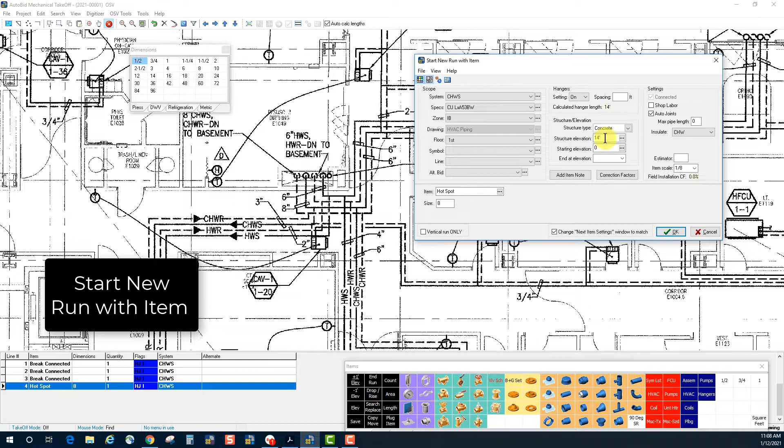The start new run with item allows us to verify all our scope items. It allows us to set elevations and also various toggles for the various different settings. It also allows us to start out with an item. That item could be a valve, could be a flange, could be a coupling, could be a hotspot.

Now, I'm going to work on this particular part of the drawing initially. We can see this is an 8-inch chilled water return down to the basement, and we're on the first floor. So that means this is a vertical pipe here before it comes up and starts running horizontally.

So let me check my scopes. Yeah, it's chilled water return, okay? And the floor and all that stuff is correct. My starting elevation is going to be 0 because I'm going to do it from the floor up.

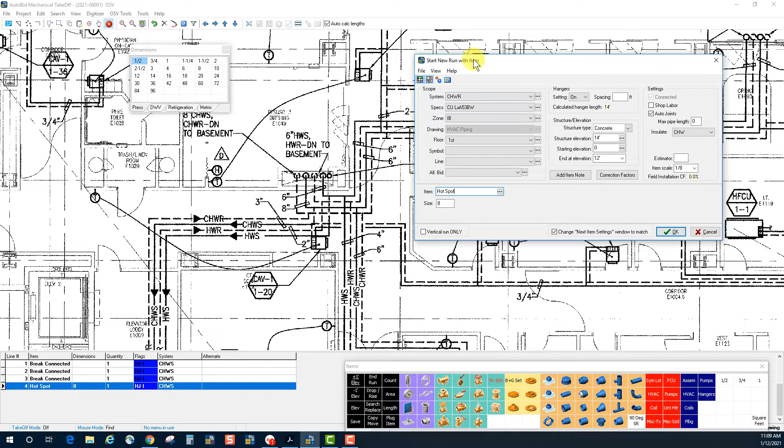Now I'm going to continue horizontal at 12 feet. That would be the end at elevation command, and that is the height that we're going to do our first vertical piece. I'm also, since I can start a new run with an item, in this case I'm going to start out with a riser clamp. And I could verify my size is 8-inch. I'm going to click OK, and I'm going to click on where that pipe comes up from the basement.

As I go along, you'll see it put the X in there, which indicates a vertical for us. So just continuing along, I have a pipe size change here of 6, just as a little reminder. All you have to do is put the new dimension in this change dims in the run field, and it'll automatically put that reducer in for you. And you would just continue down, clicking the branches if you'd like to click the branches, and keep an eye out for size changes. So let's see what that did for us.

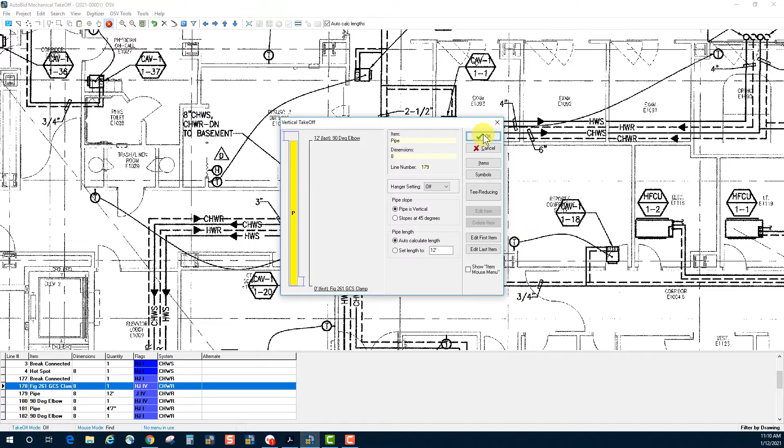I'm going to click on the X, and you can see we have that vertical pipe right at the beginning. It's 0 feet up to 12 feet, with an elbow at the top and a riser clamp at the bottom.

Now let's take a look at start new run with item once again. So I'm going to bring up that command. The situation that we're looking at where we're going to use this happens to be this pipe right here, which is a steam vent. And you should notice it just goes from floor to floor. It doesn't go horizontal, it just passes through the floor.

So we're going to be able to take advantage of this vertical run only option in the lower left corner of this window. Now I'm going to verify my system is correct. I'm going to use the steam low pressure for this. I also have to check my elevations for that vertical run only. So I'm going to start out at 0 and I'm going to go up to 14 to bring it up to the slab level for the next floor up.

When I click OK, and I come over here and I put in this vertical run only, you'll notice the drag line is not attached because this was a vertical only. So I will end my run here just to verify the run is ended. And I'm going to click on that vertical piece, and we can see that it started out at 0 and it ended at 14. Now you can go edit these items, what you want to begin with and end with.

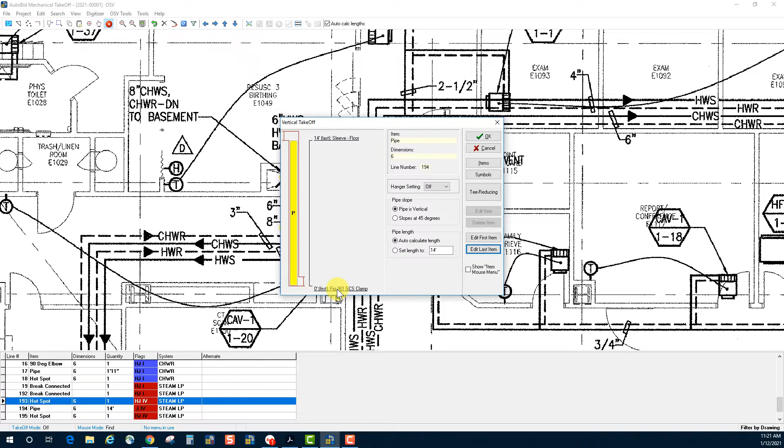So I'm going to edit the first item, and I'm going to put a riser clamp there. And I'm going to edit the last item, and there I'm going to put a floor sleeve. Now, we did not have to edit those items, but I wanted you to see that you could edit items once they're in the vertical.

So that was, just as a real quick review, using the vertical run only for pipes that just need to be vertical without any horizontal part to them.

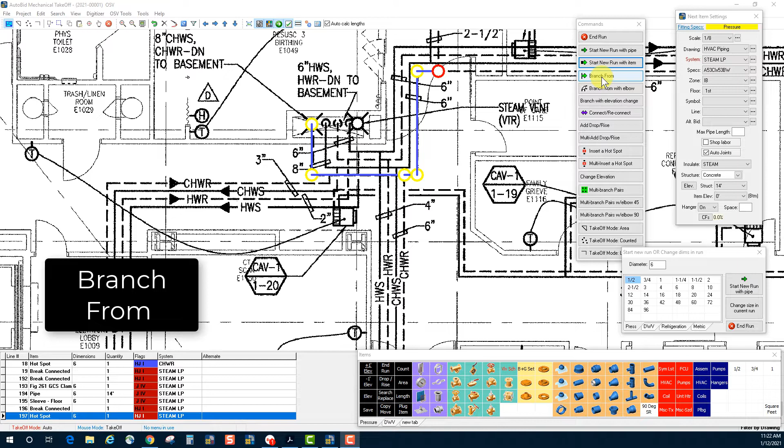Okay, the next command we're going to learn is to use the branch from command. Now this is very useful if you're going to branch from and come out straight horizontal out of the size of the pipe. So I'm going to use that for this situation right here where I've got this pipe coming out a 3-inch off that 8-inch.

So when I hit the branch from command, it popped up this little window here that wants me to verify the size.

So I'm going to put a 3 in here, and now I'm going to just click where that branch starts, and then I would go along and continue to take this pipe off as it works its way down the drawing. Let's see what it did for us here.

If I go and click on this warm spot, you can see that it inserted a reducing T for me, an 8 by 8 by 3 reducing T. Of course, the fitting specifications will probably change that into a weldolet, but it displays as an 8x8 reducing T on the screen. So that was very simple, the branch from command when you want to come out straight.

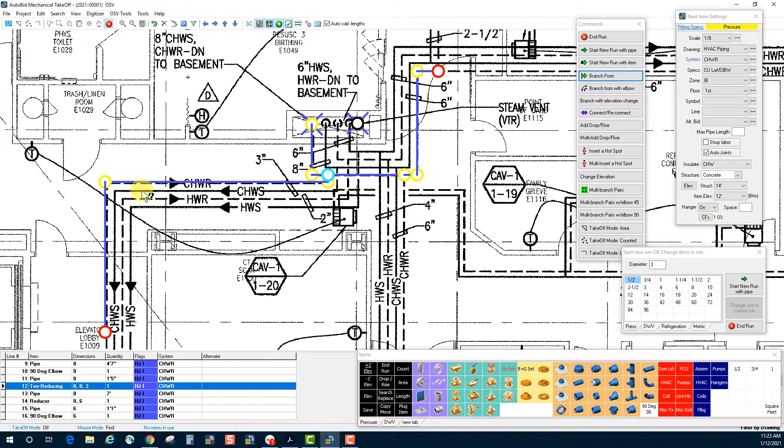Let's take a look at a very popular command called branch from with elbow. But before I do that, what I'm going to do is I'm going to be using it over here in this particular area. But these warm spots and hot spot circles are quite large and they're starting to cover up the drawing. So let me show you a little quick tip.

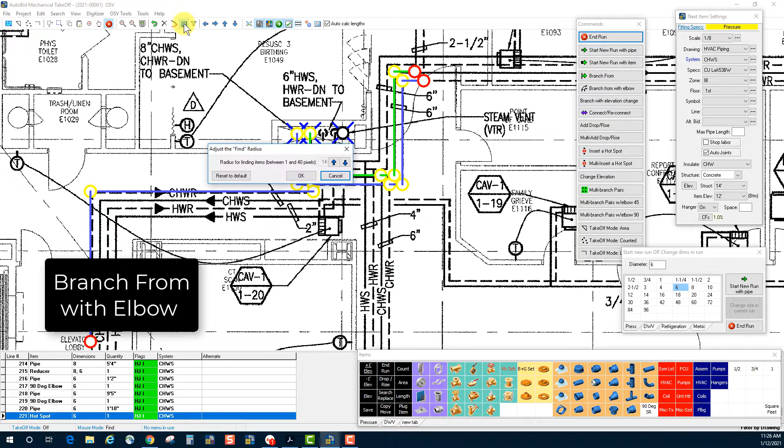This little button up here allows us to change the size of the target radius for us. I'm going to use this and reduce the size of these circles, which is our find radius, down till I could actually see the drawing pretty clearly. Now it does make it a little more difficult to click on those hot spots, but it also allows me to see things better.

Now, using that branch from with elbow, what I have is I have a 3-inch branch that comes along and goes off and feeds this part of the building. Now, if I took that off with just a simple branch from command, this pipe would run into that pipe. So I need to put an elbow either on the top or the bottom, most likely the top, to make sure that that clears that other main.

So here I am, branch from with elbow. I'm going to pick my size, which happens to be a 3-inch. I'm going to click OK. I'm going to click on the hot spot that I left behind, and then I would just keep following down my drawing, taking off this system.

Now, if I come back and see what this did, I can click on here and we can see, well, there's a 90-degree elbow now. And because this is 2D, we can't see the fitting below it, but what I can do is click the pipe just before that, and I'll see that pipe and then that reducing T, just like we saw on the return line that was automatically generated.

So by using the branch with elbow, it automatically inserted a T and an elbow to take us and let us continue on, taking off this branch with the fitting in it that we needed, which happened to be that elbow.

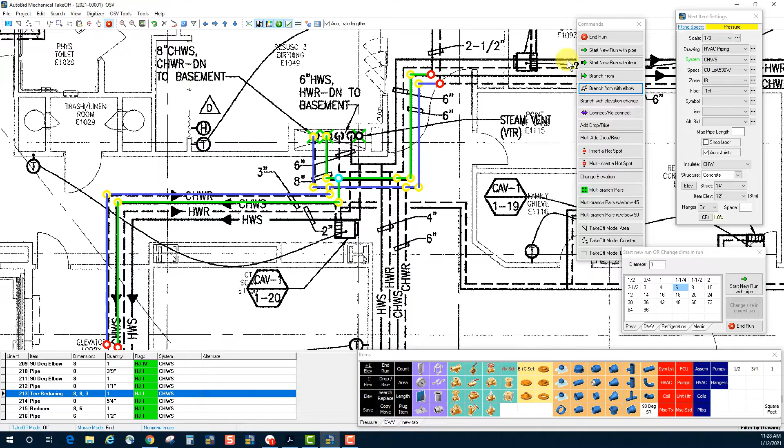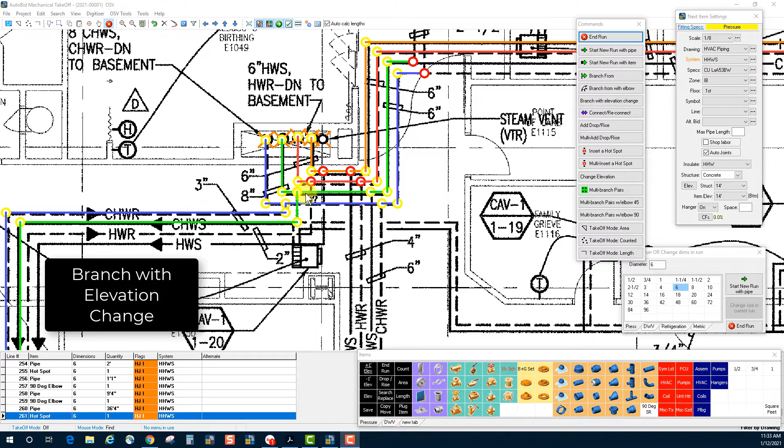Working our way down the commands, our next command I'd like to take a look at is the branch with elevation change. So in this scenario, I happen to have this pipe which is running at 12 foot across here. And I've got this branch that's coming off that needs to go under these other two mains. So knowing this is 12 feet, I'll probably drop this down to 11 feet so it can clear it.

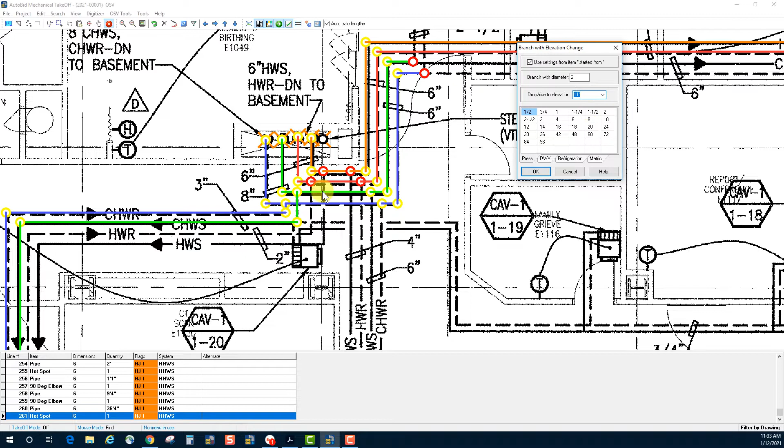So let me try the branch with elevation change and take a look at this. Here it allows me to put a size in, and I could verify that size happens to be 2-inch in this case. It also allows me to pick a drop or rise to elevation. So I said I'd probably go with 11 feet to get it underneath that 12-foot pipes that are going across there. And so I've got, just to verify that, it's going to be a branch with a 2-inch diameter, and we're going to drop it to 11 feet.

So we'll click on here. I'll go click where that branch is and follow along and take that off.

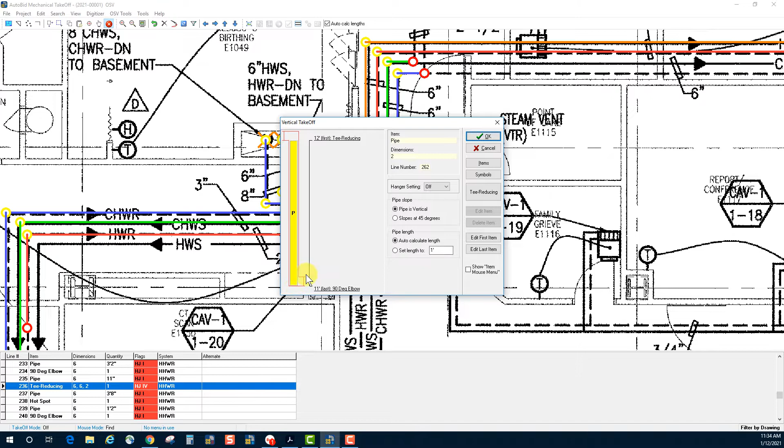Now if I click on this X, this vertical that appeared, we can see that it inserted a reducing T. At the top of that, it dropped the pipe down 1 foot and it put a 90-degree elbow on the bottom. So branch with elevation change, that's when you want to branch off a pipe and you want the branch at a different height than the pipe you're coming off of.

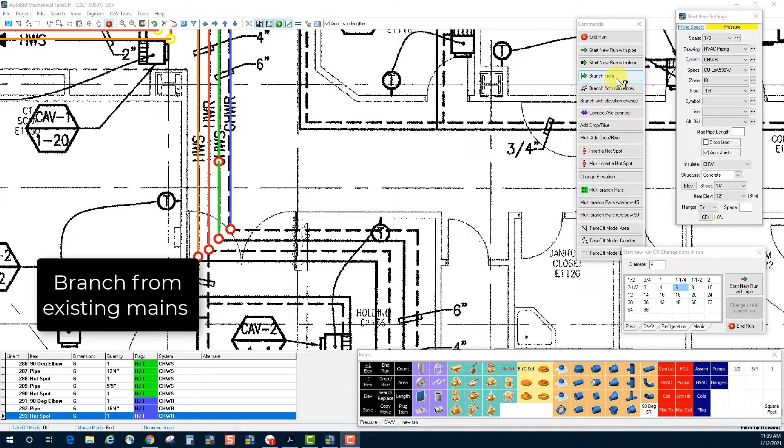Okay, I want to take a look at another situation in which the branch from command would be useful. Now I've got a situation here where I ended these pipes and I need to continue them on. So although this is technically a main, it really is a branch from. And branch from also works with like a connect to type command. So if I choose branch from and I verify the size up here, and this is 6-inch, I'm going to click OK.

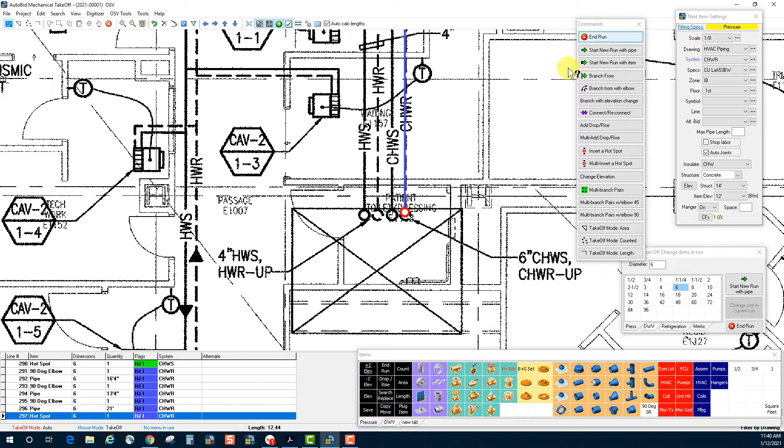And I'm going to click where I want it to continue from, and I continue working my way down the drawing until I see the next size break. Well, in this case, the pipe is going to go up. So let's see how that works again. You'll notice over here that it did put in that 90-degree elbow. So I'll do this again with another pipe.

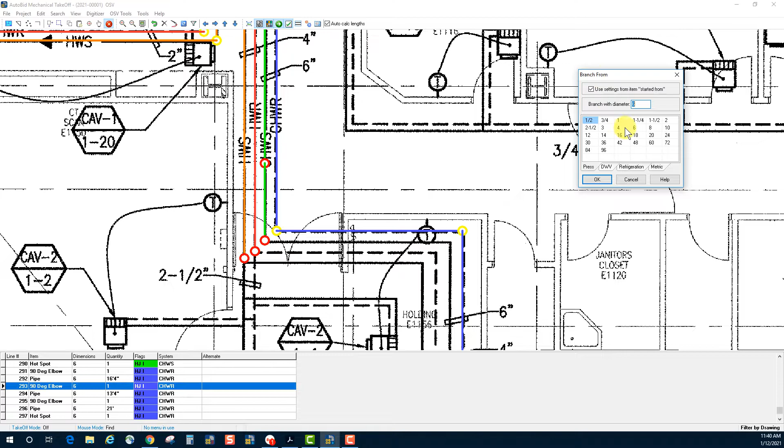Now these happen to be 4-inch. So simply, you've got a main, you got a pipe taken off, you want to connect to that pipe, whether you want to come off the side or you want to go straight with it. It's the branch from command. You verify the size, you click where you want to start from, and it will follow you along as you go along down the drawing.

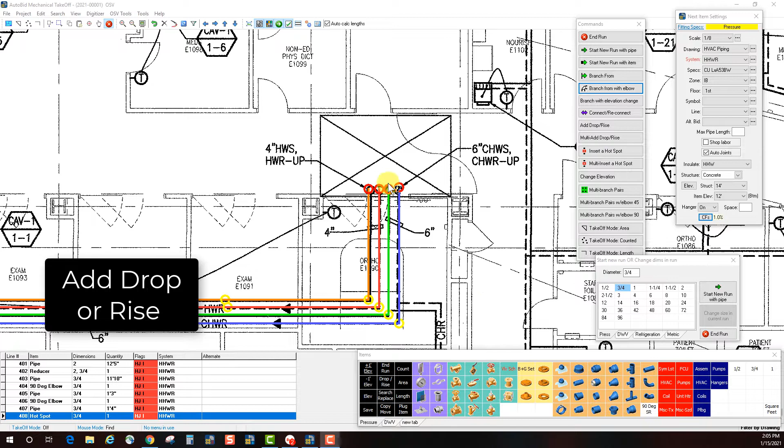Let's take a look at the add, drop, rise command. So in this situation here, I've got these pipes that are coming up from this floor and they're going up to the next floor. So I need to add a rise to these, and there's going to be an elbow and some kind of length of vertical change. So I'm going to try out the add, drop, rise command here.

And it's asking for the size, and I'm going to verify it's 6 inch. And then here's an important part. What is the height it's raising to? So I'm going to put in 16 to get us stubbed up. So we could also end this. We could end it with a sleeve or a riser clamp or a valve or a cap, whatever we might be. I'm just going to leave it as hotspot for now.

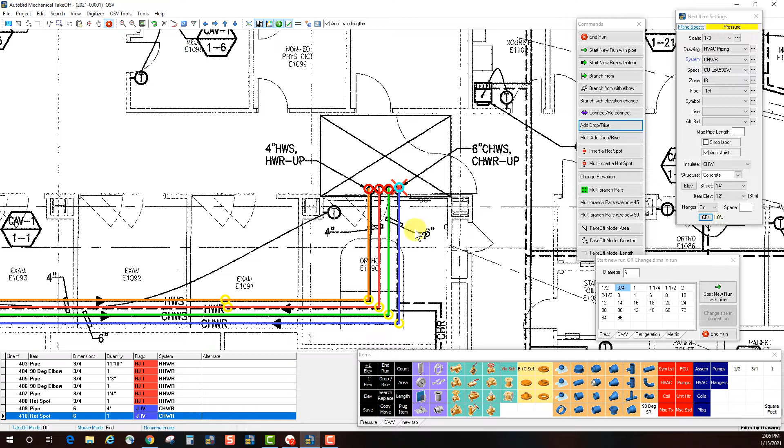And when I click on OK, and I click on that, you'll see the drag line stop because all it did was add that drop or rise. If I click on this X, you'll see that it put the 90-degree elbow and then the 4 feet of pipe in there for me to get me from 12 feet to 16 feet. So that's simply the add, drop, rise command.

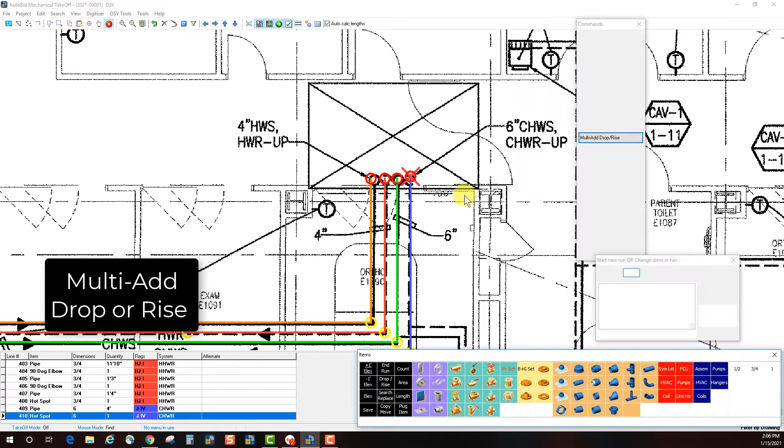Now if I want to do multiple add, drop, rises, because I have to bring these other 3 pipes up also, I'm going to use the multi add, drop, rise. And the first one I'm going to do is again a 6 inch, and it's going to go to 16 feet. So I'm going to click OK, and I put the add, drop, rise right there. The next 2 are 4 inch. Continuing with the same command, I'm just going to touch 4, and I'll put one here, and I'll put one there. So during the multi add, drop, rise, you can change sizes as you're doing it.

So in this case, these chill water lines again are 6 inch, so I'll pick the dimension 6, and I'll bring those 2 up with the riser, and then I'll switch over to 4 inch for the smaller lines. That's the multi add, drop, rise. It will automatically insert the 90 for you, and it'll insert the vertical pipe.

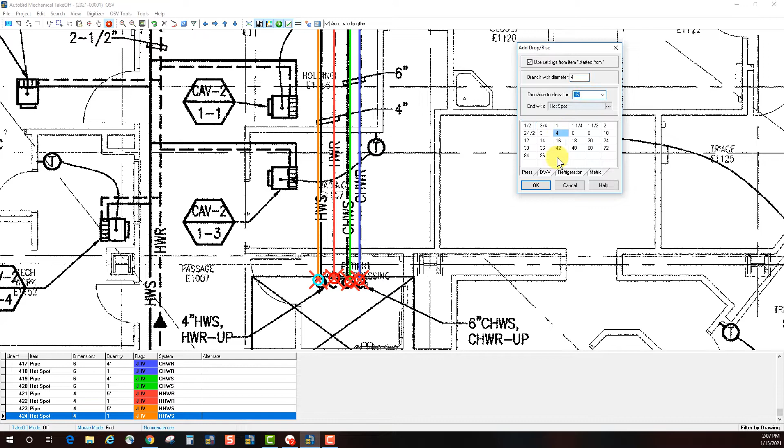If we choose to do this add, drop, rise in the middle of a run, and I'll just do a single one, what it will do here is rather than putting a 90, it inserted a T and then the vertical. That's add, drop, rise and multi add, drop, rise.

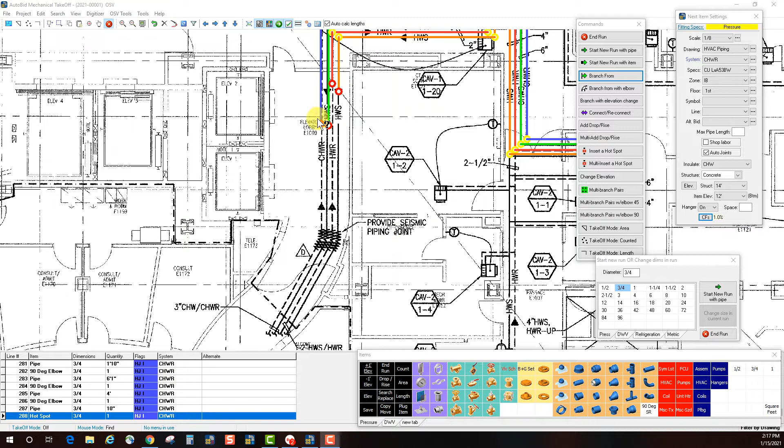Next, I want to show you how we change elevations while we're taking off a pipe. So I'm going to simulate there's an elevation change at this change direction also. So let me start taking this pipe off, and I'm going to use the branch from command since it's a continuation of the existing pipe, and I'll put my size 3 inch in, and I'm going to click on that hotspot.

I'm going to come over here, and now I want to change elevations. There's several ways of doing that. One way is using this command right here with the elevation change, and you'll notice when we do that we have a choice right here to change elevation. I may pick 11 feet for that elevation change, and I'll hit OK, and you'll see the X showed up on the screen, and I will continue on and I'll end that run.

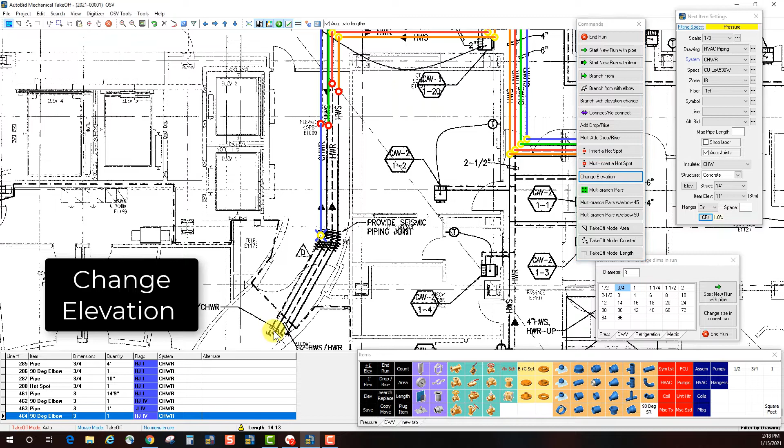So let me show you the vertical X, what appeared, and here's the 90-degree elbow. That was the first one, and then there's the second one. So here the pipe dropped down a foot.

Another way of doing this is if I'm coming along with this pipe and I get to here and I want to change the elevation, I can go to my elevation pick list provided my settings window is open, and I could pick the elevation I want to go to, and I would continue down the drawing, and again it put the 2 90s and the vertical pipe in there between them for me.

A third way of doing this elevation change, I'll again do this on this other line that happens to be 2 inch, and I'll start from here, and I want to do the elevation change here. We also have these buttons on the mouse menu, and this button here will bring the pipe down 1 foot. So if we take a look at that, you can see it put the 1 foot of vertical pipe in there, and then I can just go along and end the run.

In fact, if I want to do more than 1 foot, I can click on this place where it's going to change elevation, and I'll hit this multiple times, and each time I do it, you notice it's adding that together. It's 1 foot at a time. I just clicked it twice and now it went down 2 feet.

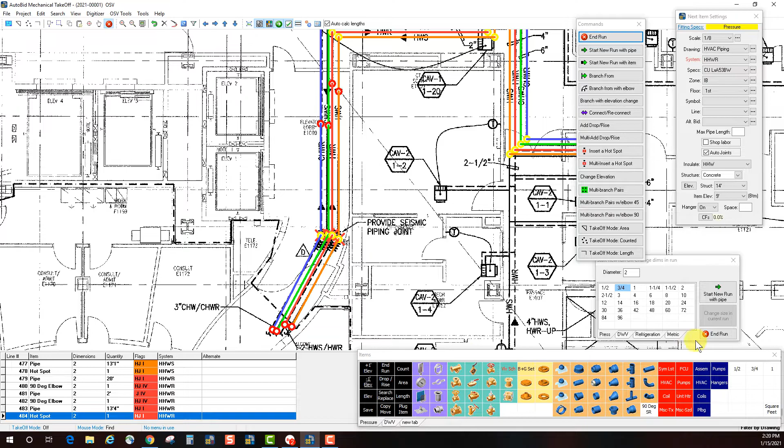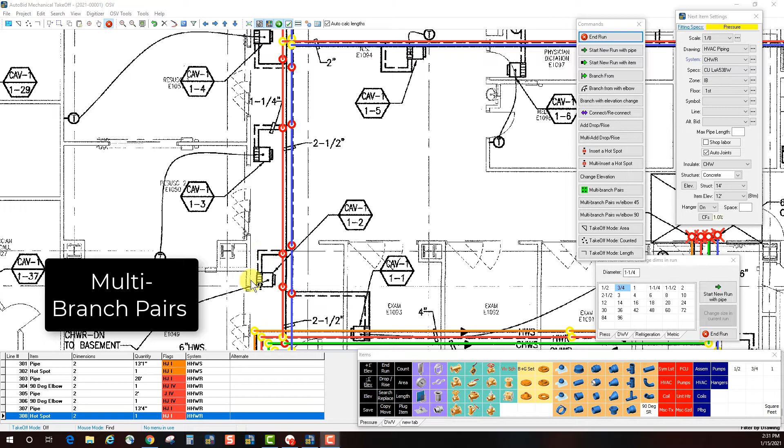Let's take a look at the command for multi-branch pairs. This means pairs takeoff. Up until this point, we've been doing continuous takeoff where it's following us continuously as we move the mouse. But when I do the multi-branch pairs, I'm going to use this to take off these branches, these multiple branches that occur on this drawing. So I'm going to choose multi-branch pairs.

I'm going to confirm the size, that was 1.25 inches. I'll click OK, and I'm going to click this first start point. Now I'm in pairs mode. It's going to follow me to the next stop point. Notice the drag line stops. It's looking for a new starting point.

I'll click on this and come over and do that new starting point. Now I'm going to go start, stop, start, stop. Again, I could just go around the drawing, taking off all these things in pair mode.

Now let's see what that did for us. When I click on this, you'll see it automatically inserted the reducing T at that start point. It made this a hot spot at its end point, but once I started from it again, it put that 90-degree elbow in for me.

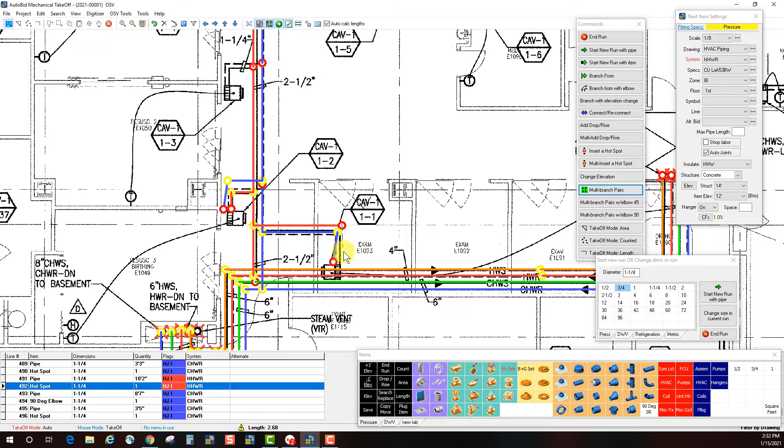So I can go around the drawing and I'll just do these, same thing, multi-branch pairs. I'm going to take off the pair of points, and I've got a pair that goes from this hot spot down to here, and a pair that goes from this hot spot down to here.

The next command that we're going to look at is the multi-branch pairs with elbow 90. In this situation, I probably should have a T with a 90 on top, and it comes out, feeds this box. Same thing here, it would be a T, and then good piping practice would be to put a 90 on top of that. We've got this occurring in multiple different places on this drawing.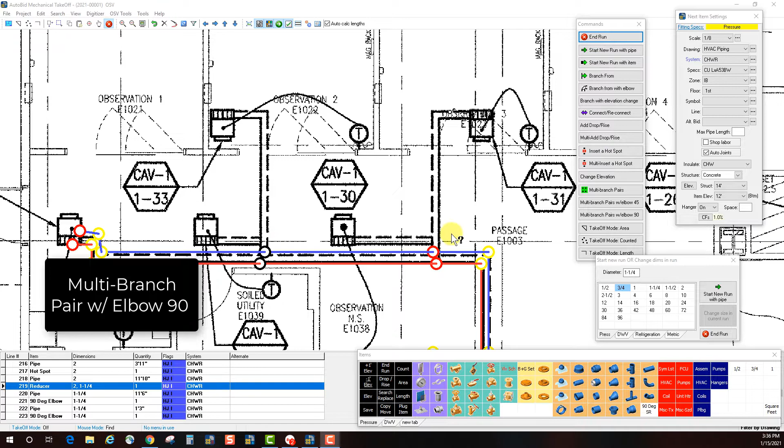So using the multi-branch pairs with elbow 90, I'm going to confirm my size, and I'm going to go with 1.25 inches for this. I'm just going to click OK, and I'll connect to this main and come out here. In the pairs mode, that was a start and a stop. I'll start from here, and I'll stop. I'll start, stop, start, stop.

In fact, I could do these 2 branches here. I'll start from here out to there, and I'll start from here out to there. So I can quickly go around the drawing, and it's inserting a 90-degree elbow wherever I start from, and then it puts a hot spot where I end. Then it'll put a 90-degree elbow where I start from again, and a hot spot where I end.

So let me end that command and we'll take a look and see what happened. When I click on this, we can see there's the 90-degree elbow in our audit trail. And if I click on the pipe just before that, I can see there's the reducing tee that it put in for me.

If I come up here, where I ended that run and then started with a 90, it actually put in 2 90s for me, because one 90 for the change direction and one 90 because I used the command to branch with an elbow. So yeah, they're 2 90s stacked on top of each other. Probably not a bad piping practice when you think you may need to change elevation, because this would probably be sort of a swing joint to get out to that.

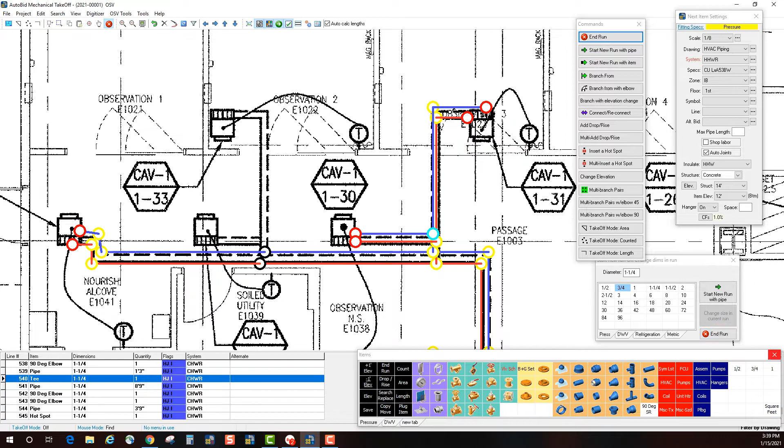The next command we're going to look at is called Takeoff Mode Area. This allows us to measure an area on the drawing, and it will calculate the square feet, or the square meters if we were in metric. I'm going to actually take off this kind of very convoluted area just to show you the power of what it can do with just about any shape.

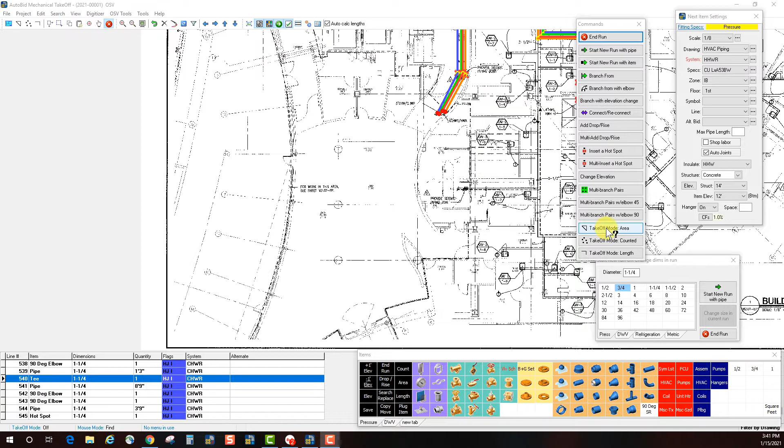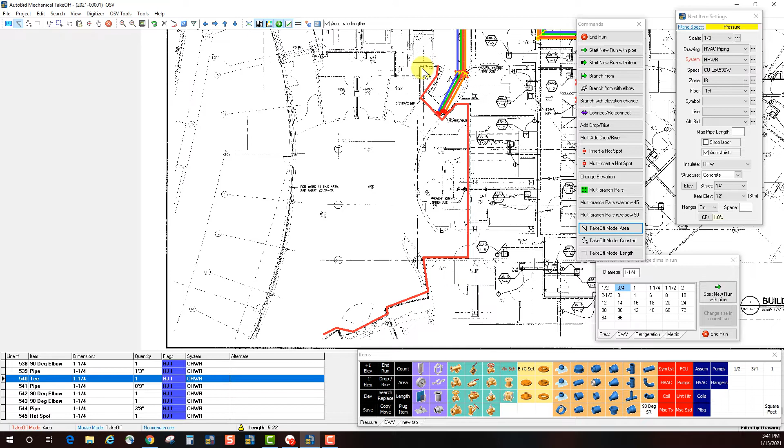So let me start this command, Takeoff Mode Area, and I'm just going to follow along to the shape of this area. Now to do a curve, you've got to break it into segments. I don't actually need to close that area out, I can end that run, and you see what's new. It measured out 4,450 square feet for that area.

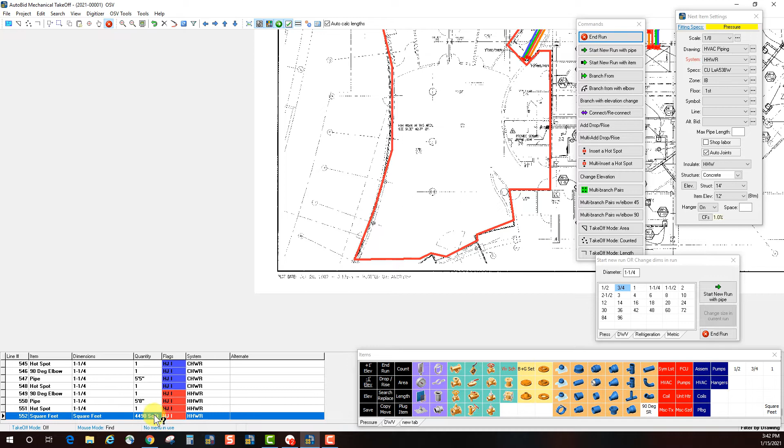Now, no piping items are available in area. I did create a little shortcut to a library item called square feet. So there's square feet, and then there's that area. When I click OK, you'll see it reports that square feet for us right down here in the audit trail, and it'll also show up in reports. That's takeoff mode area.

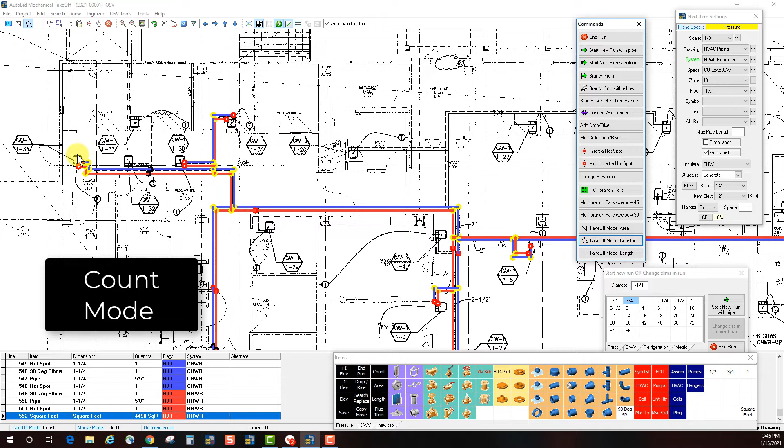This next command is called takeoff mode counted. This allows us to go around the drawing and count up multiple items very quickly and very easily. So I'm going to launch that counted mode, and I'm going to go around and click for these CAV boxes. Now I can just navigate around the screen and count all these up where they might happen to occur.

Once I'm done counting, I could end that run, and it pops up the line information for that count, and you can see I counted 11 places. Now I could put any one of these things out on that drawing, but in this case I decided to make them a symbol, and that symbol that I created was called the CAV.

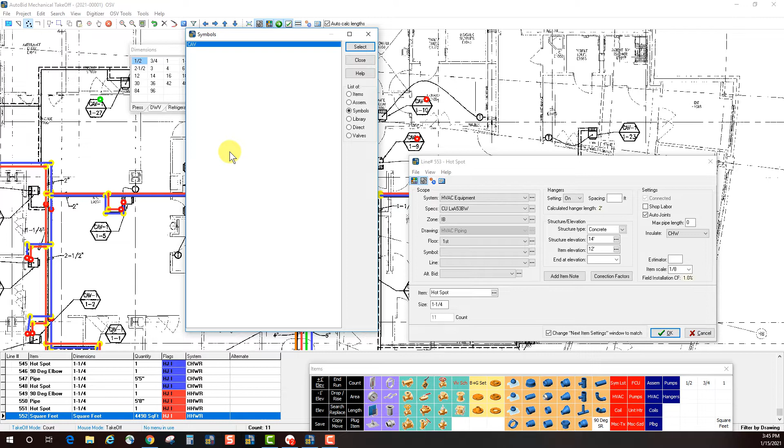So I'm going to select that symbol, and you can see I now have the symbol CAV. It occurred in 11 places up to this point, and when I click OK, the CAV shows up on the screen in the color of the system that I picked, and is counted, and the quantity is in the audit trail. So the counted mode is great for counting up pieces of equipment, fixtures, specialties, all kinds of stuff.

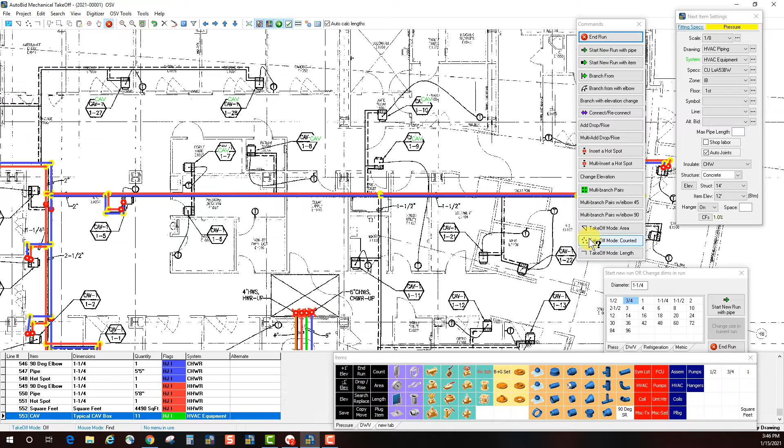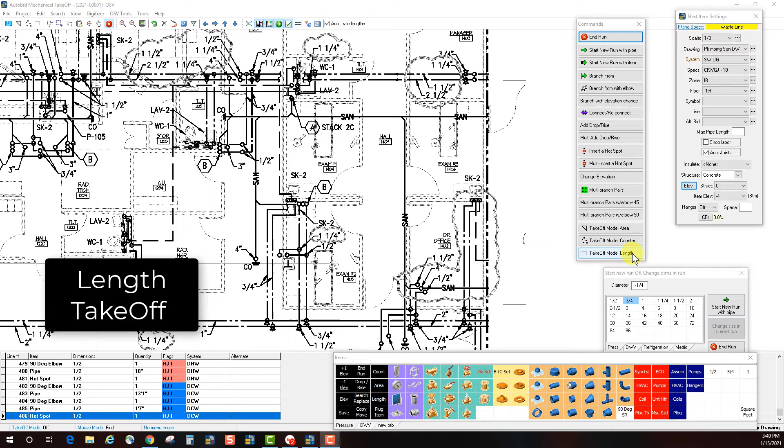Let's take a look at the command takeoff mode length. This is great for taking off things that you need to measure a length of, besides pipe, of course. That pipe command works best for that. But in this case, let's say we want to take off like fin tube radiation. That's something you would need to measure, or a trench drain. Or in this case, I'm going to show you how to take off a trench.

So I'm going to go in takeoff mode length, and I'm going to come along here and click along the pipe that I want to be able to put in the trench. Once I've clicked off that length, I can end that run, and it gives me a choice of the items that are available in length.

We could use this for pipe or pipe branches, but I actually have a length assembly that I'm going to use, and these are the assemblies for the various different types of soil to generate excavation and backfill. Let me select this, and you can see here I have the type A soil assembly. It's asking me for the pipe size, which was 4 inch, and the depth of the trench, which I'll make 4 feet. When I click OK, we can see now that it's taken off a type A soil trench, and it is 36 feet 7 inches long, and that was actually an assembly.

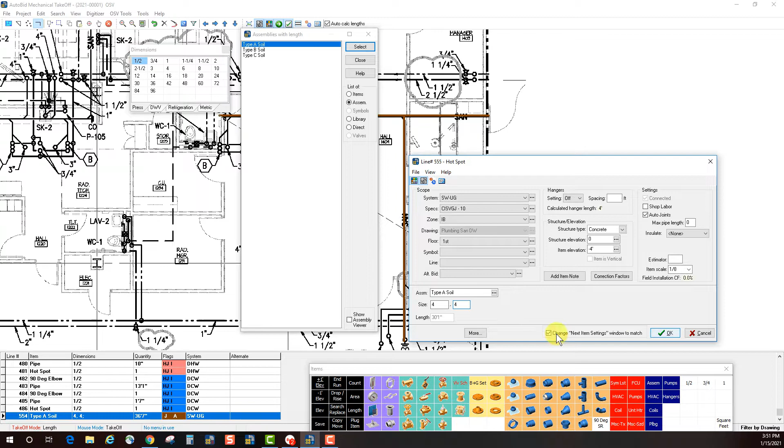So that's using takeoff mode length, and again I'll just demonstrate that quick. If I want to take this trenching area off, I could end that run, choose that assembly, and select the assembly. It's prompting me for the pipe size and the depth, so we can calculate out the excavation and backfill for this, and we can see that was a 30-foot long trench. So takeoff mode length, very handy for taking off those things you need to measure the length of.

Let's look at a situation where I want to be able to put a reducing tee in a vertical. In this case, I've got this 1.25 inch pipe coming along here, and then it's going to drop down to feed this lavatory. Off the side of that drop, we're going to come out with a 1-inch pipe to go feed this water closet.

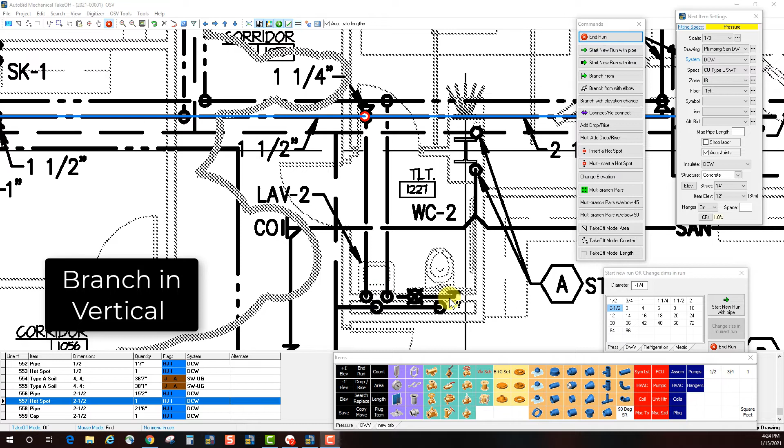So I'm going to use the branch from with elbow to initially start this 1.25 inch branch coming off to this wall. Now at this point, I'm going to drop down the wall to about a 2-foot elevation for the rough-in for that lavatory. So I'm going to use the change elevation command here, and I'm going to pick the 2 feet.

Now I'll just end that run, and you can see right now that what it had done for us is it put a 90-degree elbow at the top. It put the 1.25 inch pipe 10 foot long, because that was my 10-foot drop, and then an 1.25 inch elbow at the bottom. Now I'm going to open this vertical up, and in this vertical I need to insert a T to come off and feed this water closet.

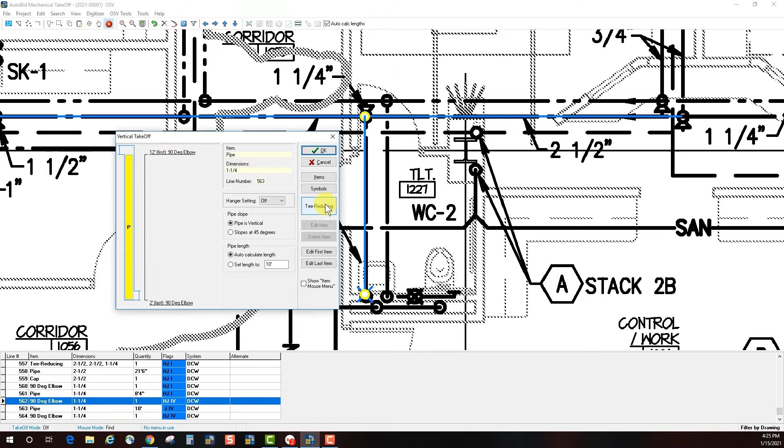So we happen to have a reducing tee button right here, but if I didn't have that button or I wanted something else, I could use the mouse menu to pick something from that, but I'm going to use this reducing tee. So now it's prompting me for the information on the reducing tee.

It's 1.25 inch coming in. It's going to be a 1/2 inch feeding down to that lavatory, and then a 1 inch in the branch coming off to that water closet.

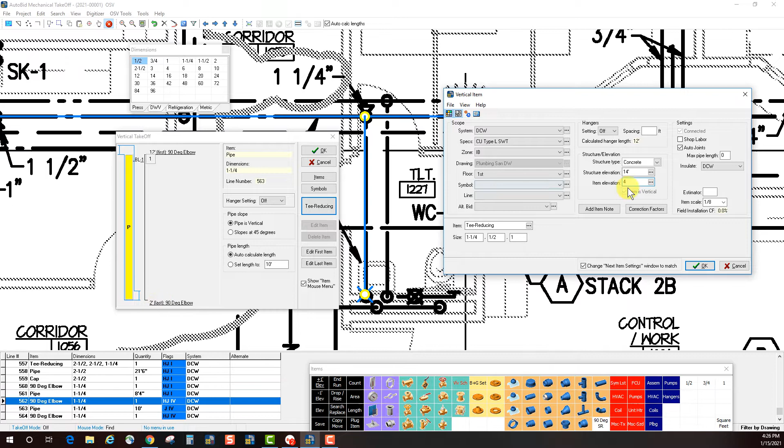Now I'm going to raise this up because I don't want it down right on top of that elbow at the 2 feet. I'm going to put the item elevation in right here. Once I click OK, you can see it inserted this reducing tee for me at the elevation that I had picked.

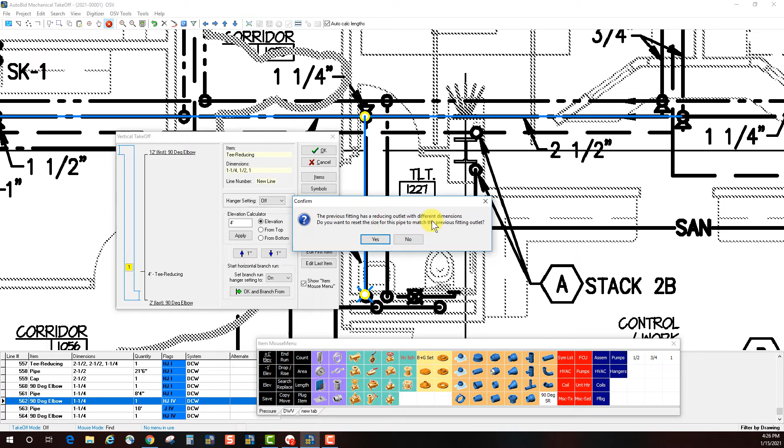Now this pipe right below the reducing tee is the incorrect size. Once I click on this, it gives me the opportunity to reset the size on the bottom of that reducing tee. And when I hit yes, we can come back here and see now it's got a 1/2 inch pipe running down to the lavatory and a 1/2 inch 90-degree elbow on the bottom.

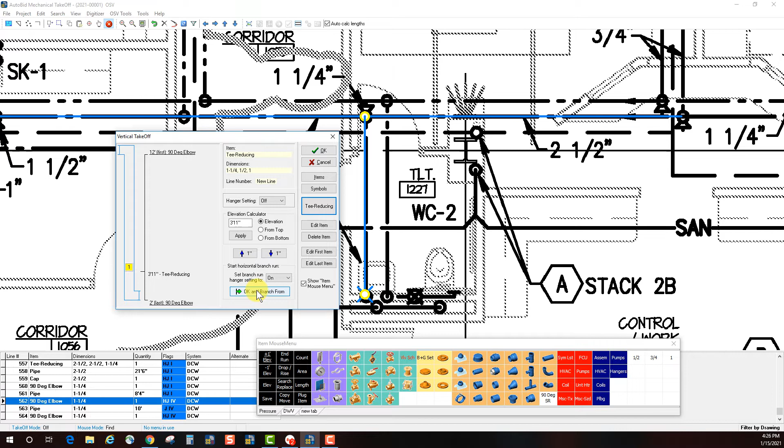Now to complete coming off of that reducing tee and out to the sides of the water closet, I'm going to use this command that says OK and branch from. So that says that this T is OK, and I'm going to continue branching from it.

Notice my drag line is now attached to the vertical, and I can come out to this water closet and I'll stub out the wall, and maybe I'll put a cap on it for testing purposes.

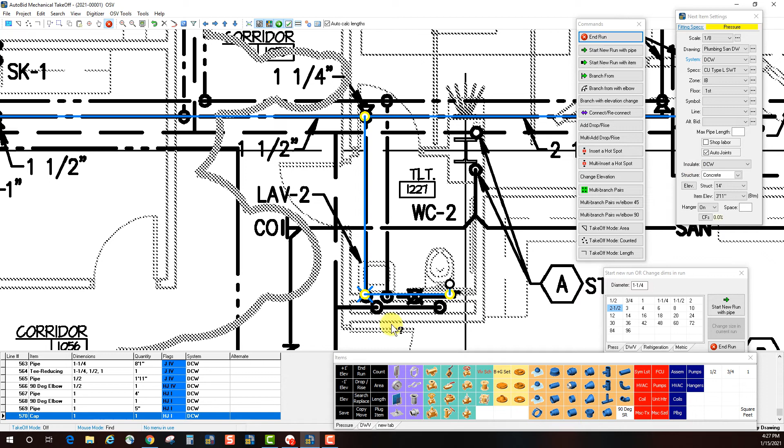So that was inserting a reducing tee into our vertical window. We could put any number of fittings in the vertical window. It was just handy to have this T reducing button.

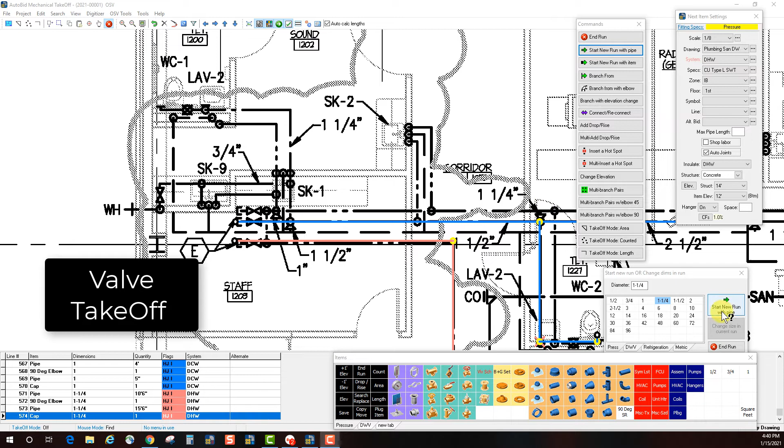Let's look at a couple different ways of taking off valves while we're doing our piping takeoff. So in this case, I've got this domestic hot water recirc line that's 1.25 inch line, and I'm just going to simply use the start new run with pipe to take it off and come along.

Now when I reach a valve, it'd be handy if I just came down here and I would hit that ball valve, and it would automatically put the little V in there for the valve, and then I can come out to the end, and in this case they're showing it to being capped.

Notice when you put a cap in, you do not have to hit the end run. So there's that valve. Now in this case, I missed these valves when I initially took these lines off.

So the easiest way to correct that would be actually to left click and hold down on that valve and drag and drop it on that pipe. And you'll see there's my ball valve, and it's actually in the correct system that I drag and dropped it on. And I'll do the same thing for that domestic cold water line, and I'll drag and drop that valve on there.

So taking off the valves as you go along by choosing the valve when you get to them is perhaps the best practice, but if you miss them or you need to insert them afterwards, it's easy to use the drag and drop feature to get them into your takeoff.

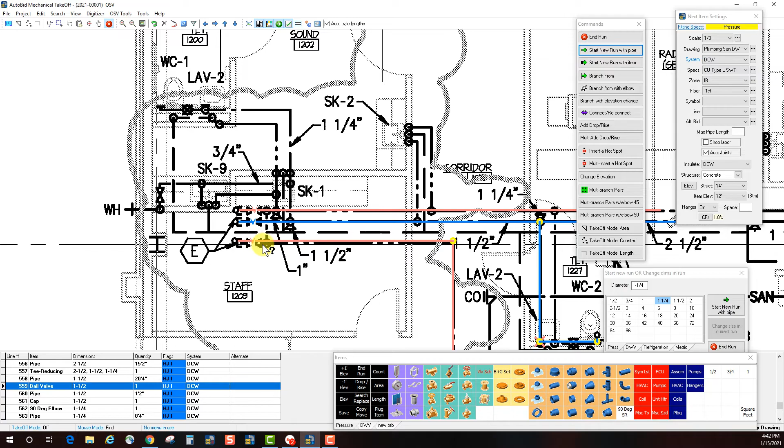Let's look at the connect reconnect command. So in this piping scenario, I have a pipe that needs to connect from this pipe to this pipe. So they want me to connect the 1.25 inch hot water recirc to the 1.25 inch hot water line.

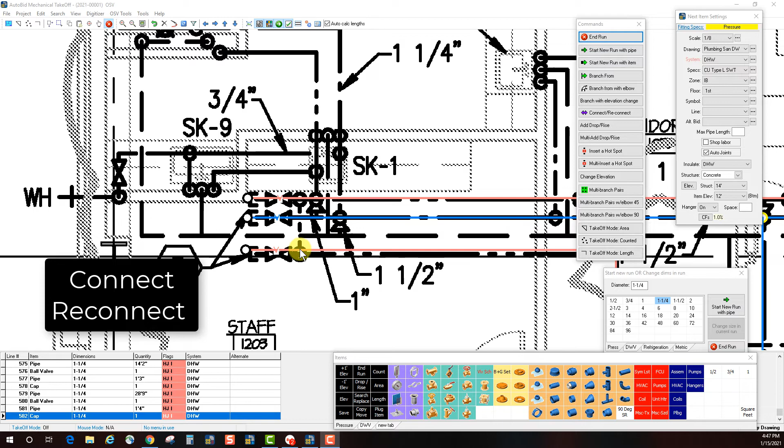So using the connect reconnect command, I have to verify my size first, and this happens to be 1.25 inch. So we'll click OK, and I'm going to say connect from here to there.

Now if I take a look to see what it did, I could see here that it inserted the T there, and it inserted the T automatically in that line, and it put a length of pipe between those two, in this case 2 foot 1 inch. So that's connect reconnect.